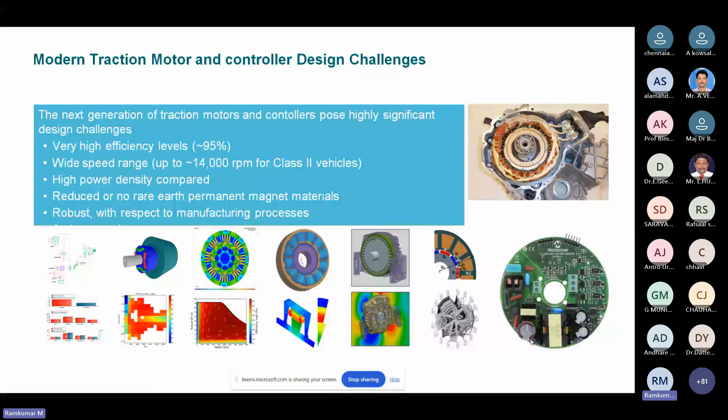Which means I need to produce a motor for the same. So due to that, axial flux is not developed in such a way to produce in vehicles in India. Some countries have established it, and India is also booming towards that. So these are the few points the industry is mainly focusing on in motor and controller design. Any questions?

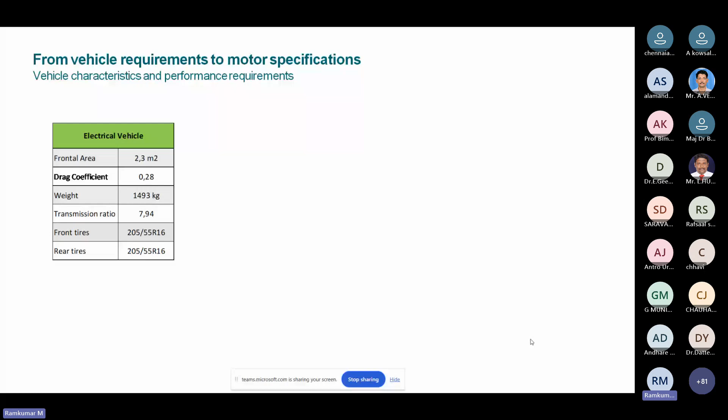Okay. When talking about electric vehicles, we need to know where I'm going to use this particular motor and controller. When I'm designing, for example, a battery, a gear system, a vehicle control unit, a DC-DC converter, or a charging unit, anything in an electric vehicle, the requirement should be there. What is the end user application, or the end user expectation? From the motor point of view, what is the top speed I have to deliver, which means the motor along with the gear system, how much speed has to go to the wheel.

When I'm designing for a maximum inclination, some degree of angle, if I'm climbing that, what is the minimum speed I have to maintain? In the product I'm using right now, we have a 25-degree inclination which I have to climb at 80 kmph. So there is a limitation for upper and lower, and you have to design a motor or any device within that.

Then we come to acceleration. When I'm giving throttle to the vehicle, how fast does it have to attain 0 to 40, 0 to 80, 0 to 100, or 0 to 120? What is the speed expectation from the user perspective? All this product study has to be done before starting the design of the product. Normally any OEM, which means manufacturer companies, start studying the market, what is the user expectation and where we are going to sell.

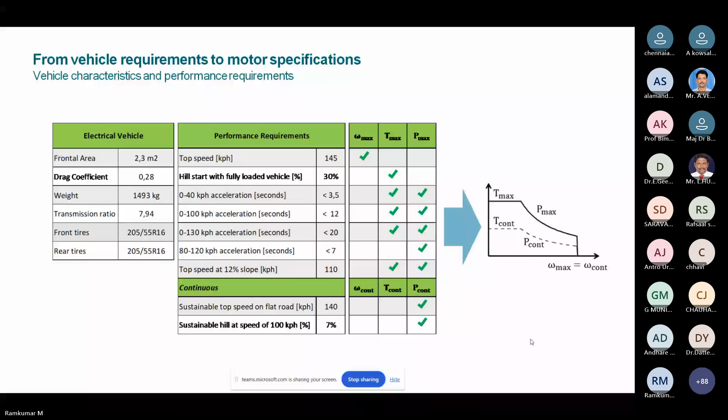So this is an interface showing how I am starting a simulation from the vehicle level. We will do a system simulation to understand the requirement of the vehicle. What is the max torque needed? What is the max power it needs? What is the max speed it has to go to? This kind of study we have to do for the electrical system.

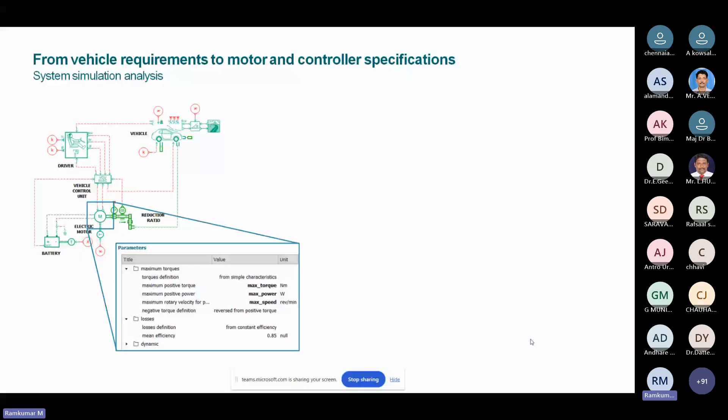We can have different sets: set 1, set 2, set 3. If I'm having this much power, what is the mileage? Say for example, I'm running a drive cycle, meaning the rider pattern. I'm taking a vehicle from Coimbatore and riding towards Chennai.

Maybe inside the city of Coimbatore, I will ride one pattern. From Coimbatore to Salem, on the highway, I will ride another pattern. Salem to Chennai, another pattern. If I'm riding like that, what is the pattern of the user, and how is the mileage getting drained? This has to be studied in the simulation.

From that, this is the expected mileage, this is the battery needed, this is the loss coming from the motor, which helps understand the torque-speed characteristics of the motor. This is the first parameter to the motor design engineer. I will tell them this is the maximum torque I need, and this is the minimum torque at each speed.

You can see speed on my x-axis. If I'm rotating at different velocities, what will be the peak torque condition? What will be the torque condition? This is called the NT curve. You might know this very well. This will be arrived at through the simulation.

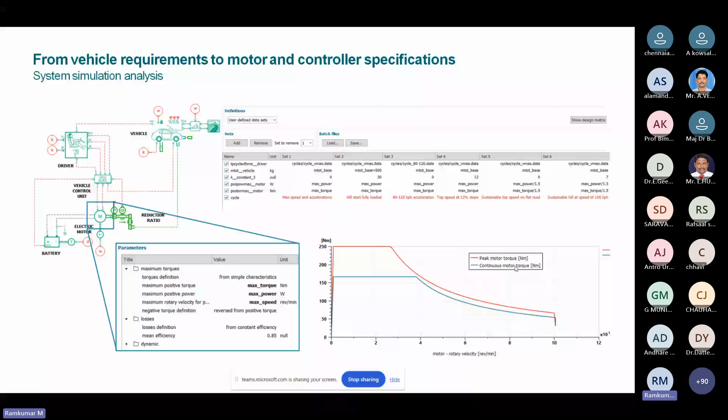All the industries are depending on the simulation aspect. Now a lot of simulation tools are there in the market. It may vary industry to industry, country to country, user to user, but ultimately the reason behind it remains the same. We have to arrive from the system at the requirement of the subsystem. This is what I'm trying to mention.

If I'm driving a particular pattern, what mileage will come? This is called WLTC. Outside India we follow this drive cycle. Inside India, we follow a drive cycle called IDC, the Indian drive cycle. Outside India it will be WMTC, the world motorcycle test cycle. There are different drive cycles for different countries and continents.

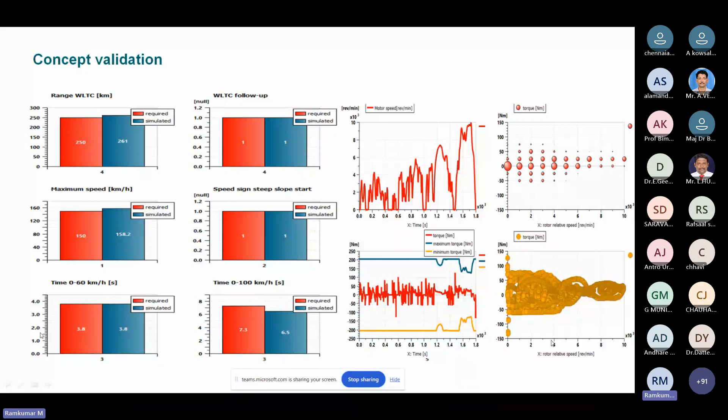So we will be predicting: if I'm driving this pattern, this is the torque needed, this is the speed needed, this is the acceleration needed. From that, we go to the subsystem. Our subsystem will be the motor and controller. So far, we saw the overall architecture of the electric vehicle. What are the electrical parameters for the motor? These are the three major inputs, and from that we will start.

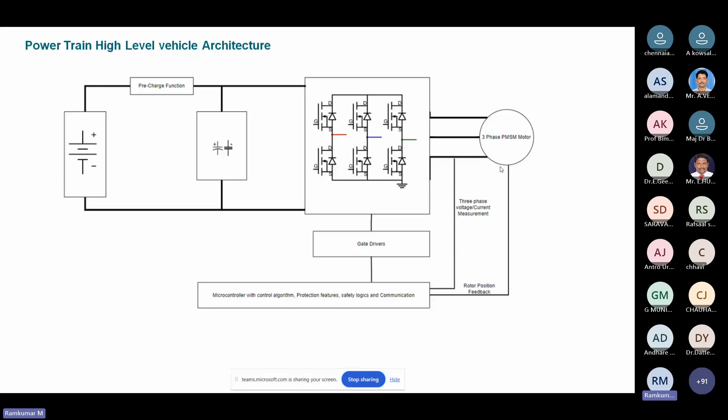As a designer of the motor and controller, we will start with the controller and the motor. The steps shown here are for the controller design, which means we need to know the system requirement. What is the system requirement? Say for example, what is the voltage I'm going to operate at?

What is the available maximum current? Say for example, what is the motor back EMF? This is important because we faced major issues. I would like to spend a couple of minutes here on how the motor characteristics are integrated with your controller characteristics.

Okay. So when I'm selecting a MOSFET, maybe I declare a 150 volt MOSFET, which means the voltage if I'm pushing either forward or backward is 150 volt, the drain to source voltage. If I'm passing more than 150, it will open out the terminal. So that is called the maximum voltage that can be pumped.

Okay. So when I'm designing a motor, the X team is doing the controller, the Y team is doing the motor. What the motor designer did, he designed a back EMF with respect to 175 volt. Then the hardware designer selected the BOM with respect to 150. When I'm running at high speed, if my vehicle is getting cut off or purposefully I'm doing a high speed, the MOSFET will blow open.

Okay. So due to that, we need to know the system requirement, which means what back EMF will come at different speeds. Say for example at 1000 rpm of the motor, what will be the back EMF? Sorry, you are talking about only a high speed back EMF. If I'm able to control that, what is the effect of having a low back EMF at 1000 rpm, when say my vehicle is 10,000 rpm? At 10,000 rpm my back EMF is less than 150, your requirement is over. Why are you worrying about 1000, 2000, 3000 and all?

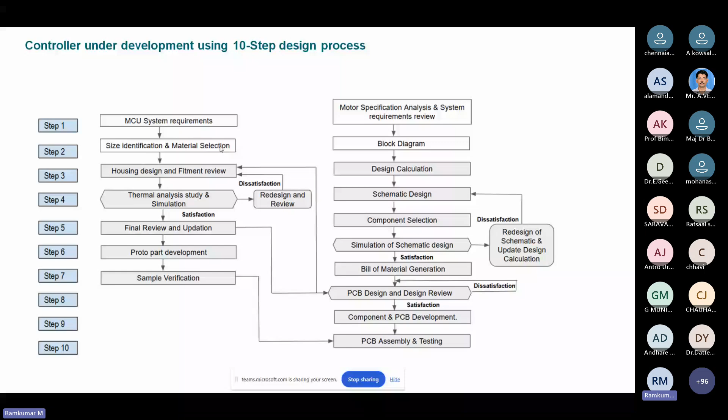How to make a design for that, how to make a schematic for that, how to make a Gerber for that. So we have to have a look into that one by one. We have to verify it. We have to make a prototype. We have to test it. We have to go for it. This is a step we have to follow in the controller design. Then in the motor design, again the same validation will come: the system requirement, the simulation aspect analysis, then prototype, then calibration of the loop.

So any system, not only a motor, not only a controller, any system, we have to start from the system requirement. Then there is a simulation. From the simulation, we have to go for a prototype, then prototype to testing, testing to calibration and fine tuning of our entire understanding. Then we have to go again to the design, modifying the design, prototype, test it, and finalize the design. This is the flow we have to follow in the industries.

Okay. In a controller, we have to have a design like that. Encoder selection. I hope everyone knows what an encoder does. Encoder will be the position sensor for the motor, which will be near the motor controller as well as the motor shaft, which means your motor will be communicating where I am right now, because PMSM is not a self-start motor. To start the PMSM motor we have to do two things: we have to do a VD0 and give a three-phase supply, which means I have to align it to D axis 0. Then if I'm pushing a current, it will start rotating.

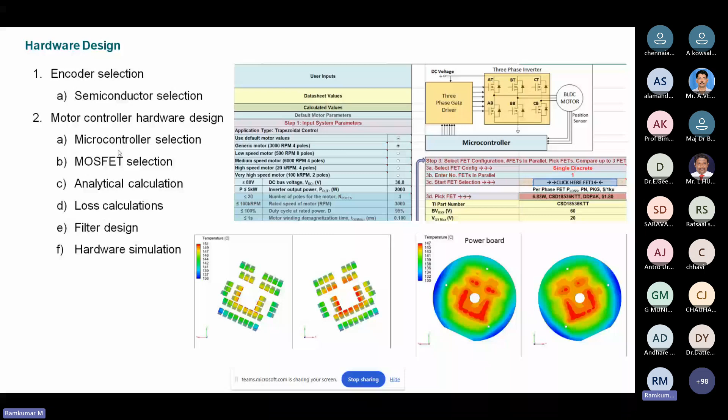Second thing will be ripple. So I have to have a kind of filter before the drive unit - meaning for my drivers, I need to add some LC filter or not. Those kinds of calls I have to take based on which IC I am going to use. This is how we are selecting the component. Then we go for the design - starting with analytical calculation, then loss calculation, then filters calculation, then hardware simulation. These are the kind of flow as we saw in the previous slide.

Like this, we have to go for the design.

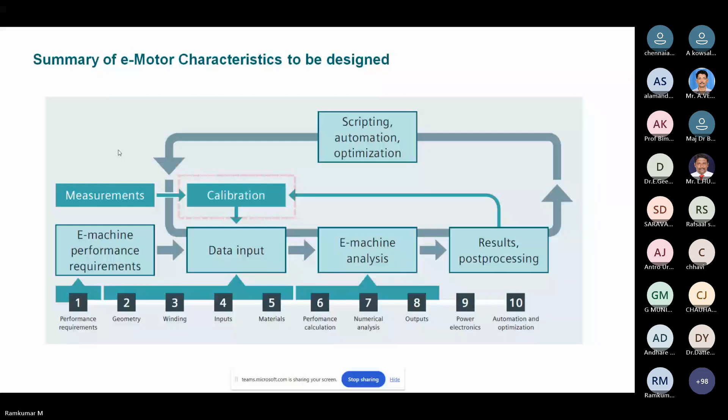In my current architecture, or any electrical vehicle architecture, as a motor controller we may have a DC input. In the DC input we might have a DC link capacitor to have smooth interaction between the controller and battery. It will also prevent sudden flow on surges - it will impact the ripple as well as smoothing to the back EMF. These are the two things it will help into the system.

Second thing, we may have a DC voltage sensor to sense what voltage is coming in, so based on the voltage I can have an algorithm. Say I'm operating at high voltage - say my voltage is 72 in the system, which is high for me. I can inject an Id-Iq which is deciding the torque can be very less, meaning voltage is high so I can push less current to produce the same power. If my voltage is getting dropped, meaning my power will be reduced, I have to inject a little more current to maintain the same power.

Ultimately, I have to produce the same power. If voltage is high, I can have a subproduct where current will be a little less. When my voltage is getting dropped, I have to inject a little more current to produce the same output power. This strategy has to be handled by the software, so that is what we have to write an algorithm for.

Normally I segregate IDIQ, which means direct axis current, and Iq, which means quadrature axis current, into high voltage, mid voltage, and low voltage. I will have a three lookup table into my algorithm.

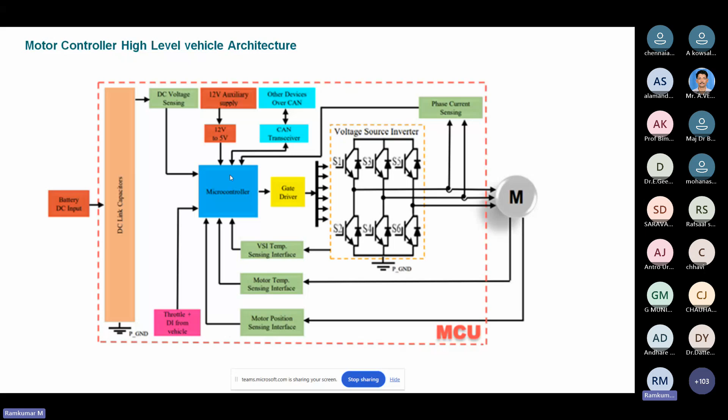It will get an analog value, and from the analog value it will convert to a digital value for you. It will give the signal straight away, and from the signal you have to read and react to it. These are the strategies in the two-wheeler or car segment, depending on the architecture. These are the points I'm trying to mention, highlighted on the left side.

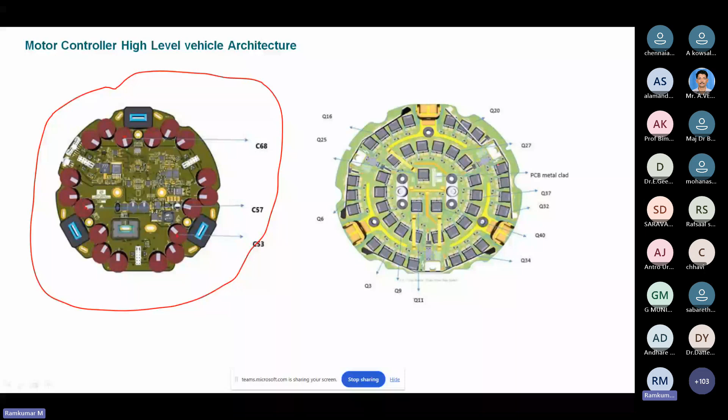This left side product will be my LV section. The other one will be my HV section, which means my power board. The power board will have my MOSFET and gate drivers, so other ICs will be seated there to handle the power things. It has to be connected together as a separate board, connected one to one for communication purpose and for supply purpose. The LV section will have interaction from the controller board to the power board, and the HV section also needs power transmitted from the LV section to the HV section.

Okay, so any questions from the audience or members?

So we talked about the controller design. Then we will go for the motor design and system level next. So when we are doing this motor design...

Yes sir, we have a few questions. Yes sir, please. Which is the most commonly used microcontroller for motor driver application in the industry?

In the industry, we are using S32K3, which has the capability to handle ASIL C micro safety, available from NXP as well as microchip, with our switching frequency supposed to be 15 kilohertz minimum. That is the expectation, then the microcontroller IC should handle ASIL B minimum. This is what the standard says, so based on the standard we have to select the IC. In Royal Enfield, we are using ASIL C grade, which is one step ahead of the standard, with 15 kilohertz, using the S32K3 NXP IC.

Sir, one more question. How does the controller implement various motor control algorithms, for example PID or FOC, at a high level?

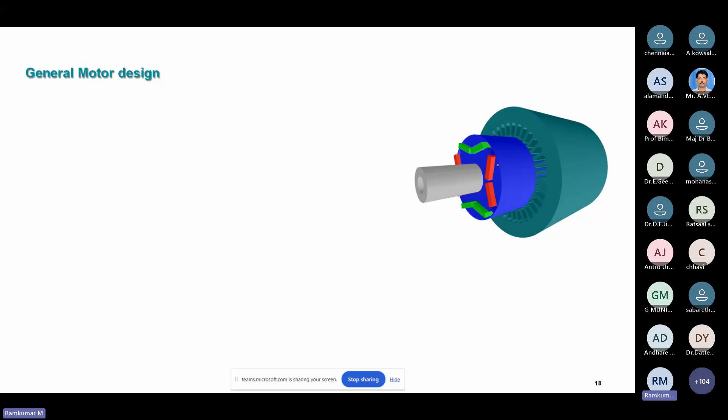So next will be motor design. This may be my second but major domain. I would like to share my history, how I came to be a motor design engineer. So the first job for me was writing algorithms for the controller in embedded C.

I still remember, so I went to the job. Within 2 months, there was a chance to test the algorithm I wrote. There was a motor given, a test bench given to me. The first motor shaft was broken in my first test itself, which means my algorithm frequency was not synced with the motor. My algorithm frequency was something different, my motor switching was happening into some other things, it hit my test bench, and it got broken. This was the first thing.

Then I understood I'm not only a software engineer, I should be something else. So then I started to dig into that. There was a chance to move from software engineer to designing a PCB, since it was a small startup company. So within 6 months I became a hardware plus software engineer. Then within another year, I also became a motor design engineer. This is how my journey led to becoming a motor controller design engineer, so this is the flow. When I became a motor controller engineer, I came to know the entire system.

I'm really requesting all the audience sitting here, please teach your students about system requirements. If, for example, you are designing an induction machine, there are different classes of duty. Whether it's continuous duty or intermittent duty, whatever class of duty you define, the design has to be changed accordingly.

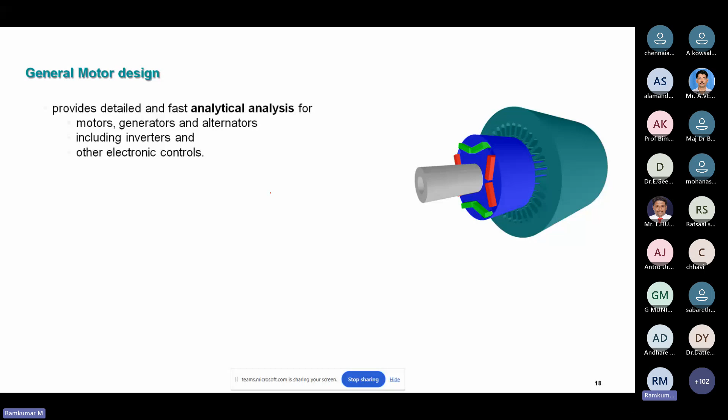So when I'm starting a design, I should know the motor characteristics. I should know the generator along with inverters and control logic. This is what I'm telling. So that's why I'm talking about analytical calculation, which may be Excel, which may be MATLAB, which may be 1D simulations. There is a professor called TJ Miller. I hope everyone knows. He wrote books also. He made excellent software called SPEED. So this software will create the entire motor design within 2 seconds.

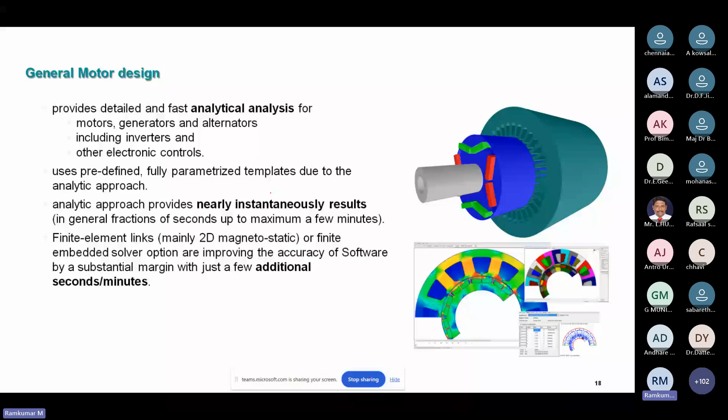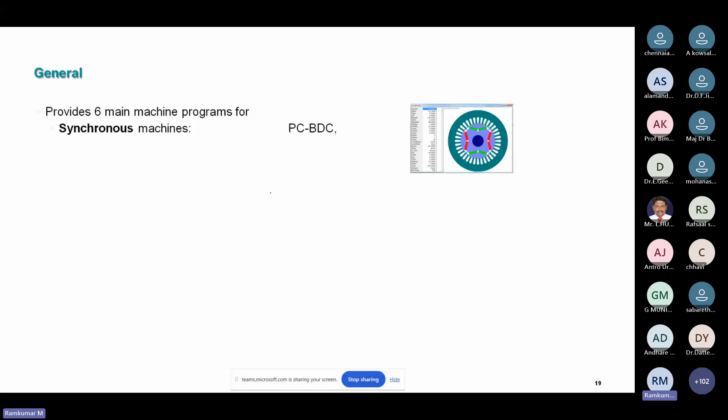If you are giving the limitations, say for example, this is my L by D ratio, this is my power requirement, what is the possible slot pole combination? What are the possible motor characteristics? The same characteristics we can compare with different motors. So when I say I want a particular torque and speed, which motor do you want to design? It may be a BLDC, an induction machine, a reluctance machine, or a DC machine. So many machines are there in the market. How to decide which motor I have to design? This platform will help you.

If I'm designing this particular motor, what bill of material will come? Bill of material means how much weight your rotor core will have, how much weight my housing will have, how much magnet weight, how much length, how much width. The entire characteristics of the motor you will come to know.

So how can I go for it? When I was doing the initial design, I came to the conclusion for my design: BLDC, which is called a PMSM, with concentric winding. PMSM originally will have a distributed winding, but in the EV industry we are using a concentric winding. This combines BLDC and PMSM characteristics. And axial flux has major advantages. So when proceeding to the next stage, I propose to my higher management: either I will go with the PMSM or with the axial flux. These are the merits and demerits of both designs.

When I'm proposing that, I'm not the only person going to decide the design. My manufacturing guy, my quality guy, my testing guy, my system guy will come and sit, and also battery and other subsystem guys will come into the picture. They will ask their requirements. From the battery, if I'm asking for 500 amps current, he will not give it to you. His limitation is 100, 200, 300 amps. He will tell whether he is able to produce within the parameter. Then my mechanical designer will come: my vehicle environment is this, for your motor you can have this much size. Within these limitations, which machine are we going to adapt?

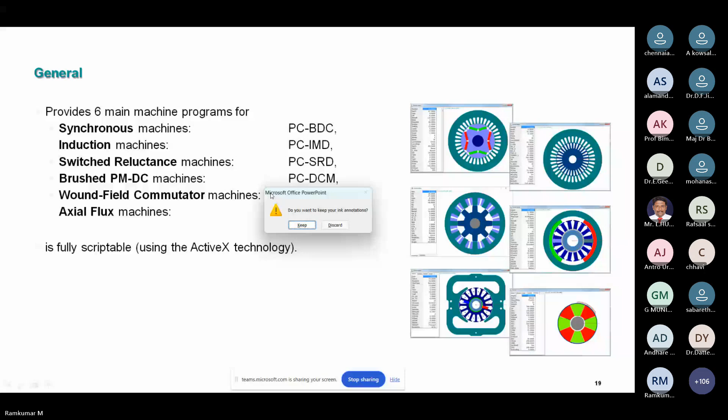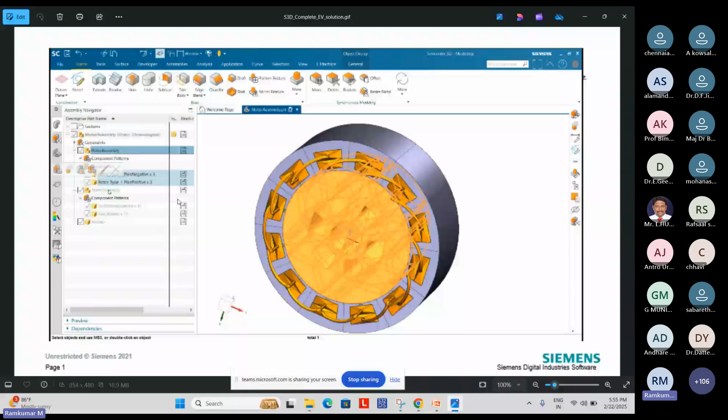See this particular video. When I'm changing this panel, okay, what are the inputs? I'm designing a machine with respect to slot pole combination. I'm going to the particular model. I'm changing a particular value. You see, the entire model gets updated from the stator to my given value. Okay, this is not an inbuilt software characteristic, which we have to make fast for the user.

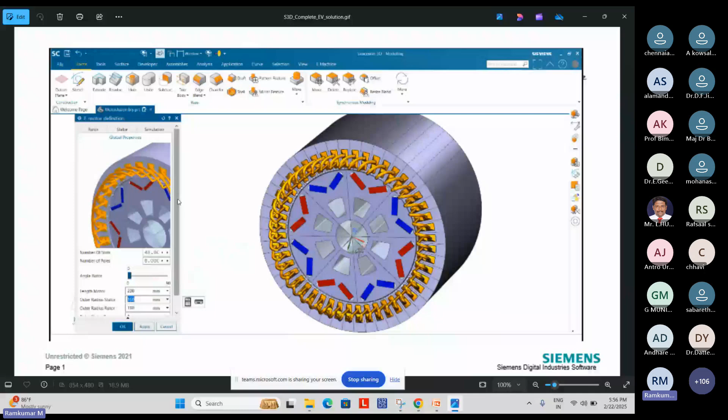For example, I'm designing a 3D model of a particular motor. If I want to design it, it will take 2 to 3 days for a particular slot pole combination. Again, I want to try a different slot pole combination. If I try it, again I have to take 2 to 3 days, which the industry will not allow you to take. For that, we wrote a script along with my team.

So when I'm having a particular requirement from the current design, if I'm changing a particular length or a particular slot pole combination, can I run the simulation? Yes, we can, which will make it very fast for you to proceed further. And also you can have a DOE, design of experiment.

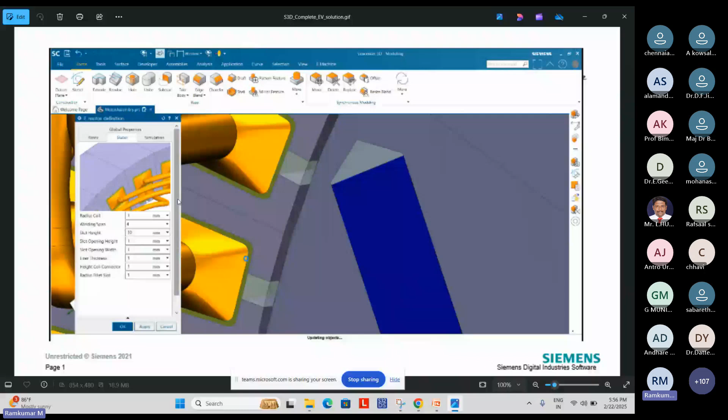If I'm doing this, this is my output. If I'm having this combination, this is the expectation. If I'm having a stack length of X, Y, Z, what will be the result? This kind of iteration can be done not only in analytical simulation, but also in a 3D simulation. Okay, so this is a normal industry practice.

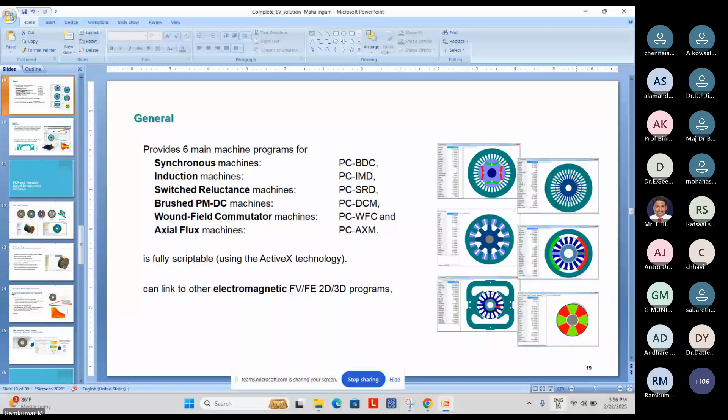So once done with the particular design iteration, you have to look into that. We run a simulation. You see, n number of iterations tried. In the n number of iterations, there is one place that came near to my requirement. These designs are going to help me at the further level, which will happen within half an hour. That is more important. I tried every simulation in the platform of the SPEED software to conclude in half an hour. So I try, say for example, 1,000 designs.

Out of 1,000 designs, I'm going to pick only 10 designs. In the 10 designs, I can further investigate. I can shortlist a number of designs. Okay, so this will make things very fast for you. You can see here I'm getting an efficiency map. I'm getting speed torque characteristics. All those things. From that, I can conclude my design.

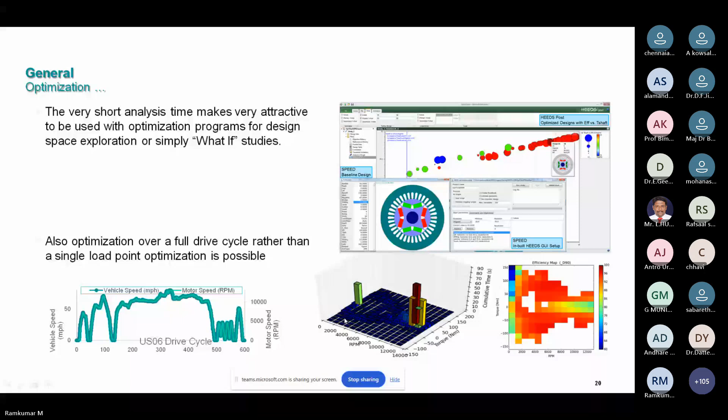Okay, once done with the 1D simulation, we will move to the 2D simulation. Again, if you are not convinced with your particular model, we can do any of the models designed in the previous 1D platform. Here we can study temperature, flux density, or demagnetization effect. I hope everyone knows demagnetization. Okay, so magnet, if you are...

Say for example, I'm using an SH magnet, which will withstand 150 degrees. If I'm using a UH magnet, it will withstand 180 degrees. If I'm using a UH plus some additional material, it may go to 200. If I'm using an EH magnet, it will be 240 degrees. These are the different magnets.

When I'm using this magnet, if my motor is getting heated up beyond the particular temperature, the magnet will get demagnetized. Or in the motor, if there is eddy current loss in the magnet, it may also lead to demagnetization. So these are the things you have to study and understand as a field study.

So field, we are talking about B, magnetic flux density, magnetic intensity. Your heat flow, thermal heat flux, magnetic flux, all those things we can study. We can understand how this motor is going to get... or the study will happen on the particular platform.

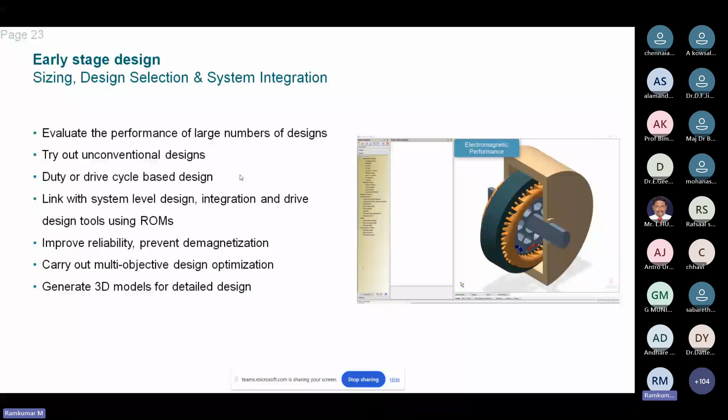Once done with that, we will be moving to the multiphysics simulation, which is called 3D. Before moving to that, we may also have in the 2D platform a drive cycle, meaning different speed-torque characteristics. If I'm changing it continuously, for the first 1 second I'm running with a particular speed and particular torque. In the second curve, I may have a different profile. If I'm running like this, how much time will it take to heat up to the maximum temperature?

For example, I have a cutoff at 190 degrees in the motor. At 190 degrees, to run this profile, how many cycles does it have to go? Say I'm starting a vehicle from Chennai to Vellore. If I'm going at max speed continuously, what temperature will it reach? Will it reach the cutoff or not? Those kinds of questions will be answered by the simulation, so we can go for the detailed study as well.

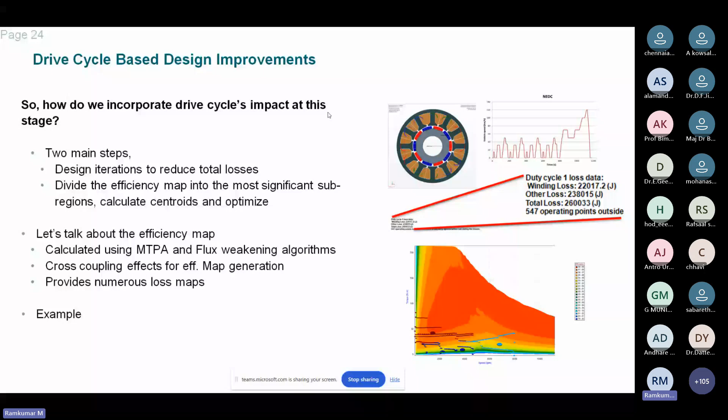Once done with this particular study, we can go for 3D model integration or system integration, where we study the vehicle-level things. We can pull the whole motor design into that, run it once again, and understand whether all the characteristics are fulfilled or not before moving to the prototype.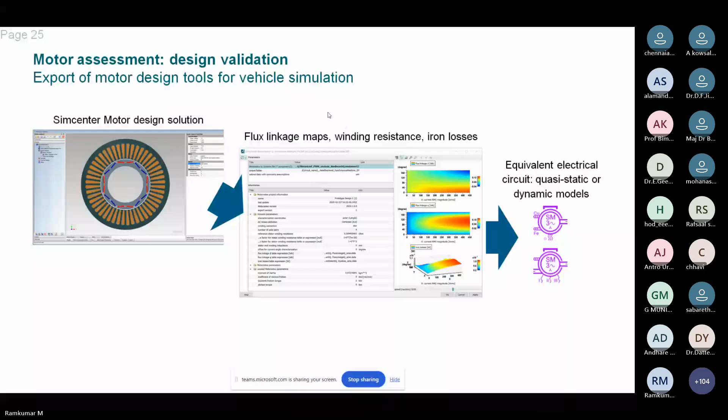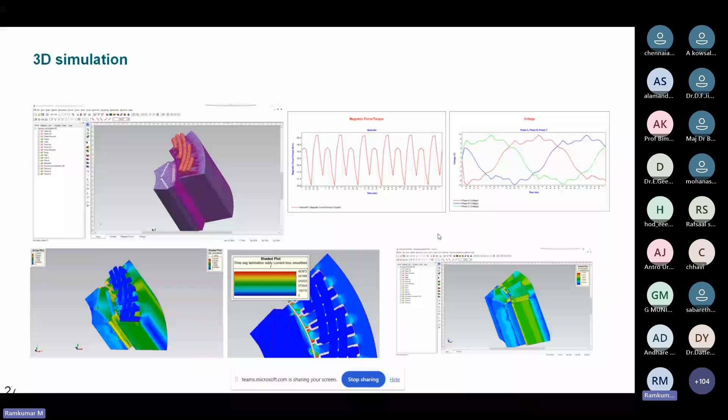3D simulation is really tough, but it will help you understand the major impact: each corner of the motor, the entire 3D model, we have to study and get the feel of the particular design. So you have to understand the different aspects. This is the video I showed you as a 3D model. Any questions on the simulation? 1D, 2D, 3D?

Sir, no, sir. We can move forward.

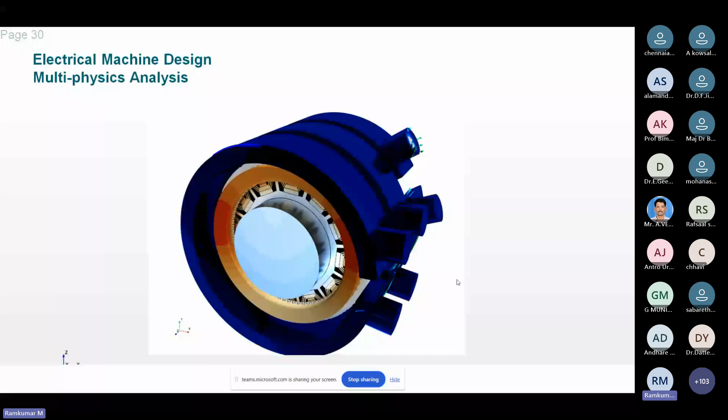Next will be multiphysics. I will show it in this video, which is separate. I'm using an older version of the PPT, so it's not available in this PPT; that's why I have a separate file for it. When we are talking about thermal study, we need to understand how much. For example, if I'm running an air-cooled motor, after some X kilometers, maybe 100 or 200 kilometers, my vehicle will get a cutoff. Will the user like this or not?

This question will come. The user may say, I'm from Bangalore, starting from Chennai, 350 kilometers from here, and I don't want to stop in between; I want a single ride. Is your vehicle able to provide that? If that requirement comes, we may go for cooling technology, meaning another oil system. The oil will be pumped into the motor, either the housing or the shaft; different duct systems are there. We can have forced cooling, extract the heat out of the motor, and run a little more distance.

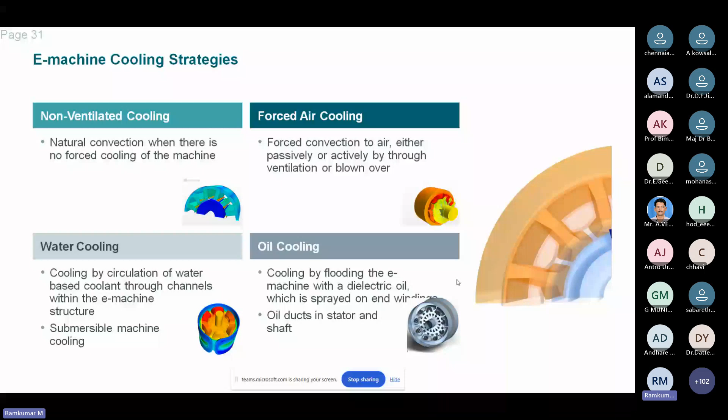So these are the studies we have to make: either conventional cooling or forced cooling. If it is conventional, it's air. If it is forced, we may have forced air, or an oil or water jacket. So different cooling technologies are there to incorporate and study after the simulation. The flow will be 2D simulation, extracting the loss. From the extracted loss, we do the thermal analysis. If the thermal analysis shows the temperature heating up too much, we have to go for a design change.

Can I change the thickness of the motor fin from 10 mm to 15 mm, or 1 mm to 2 mm? If I make that kind of change, what will be the impact? If my temperature profile is good, there is no impact on my first design. If I reduce the fin size, it will reduce my BOM cost, because I'm using an aluminum housing or a particular compact, costly material. So if I reduce the size of the housing fins, can I go for it?

Next, if it is oil cooled or water cooled, I'm pumping at 10 liters per second or whatever it is. If I'm pushing 10 liters and the temperature is good, can I reduce the flow from 10 to 8 or 8 to 6? What will the impact be? If the flow is not sufficient, we have to increase it and see. These are the simulation iterations that have to be done before making the prototype. So this is the characteristics of the motor, and these are the variations of my design.

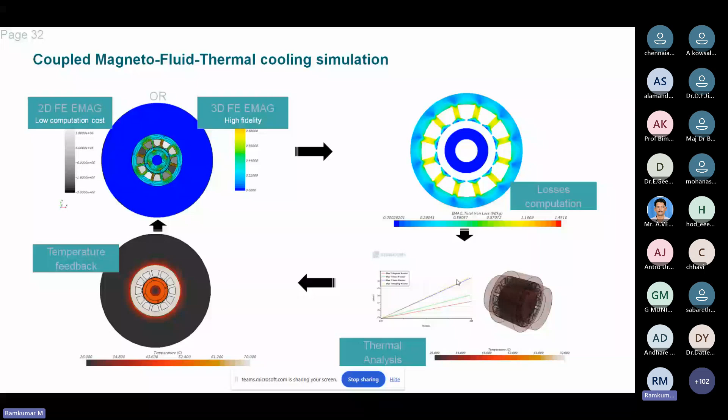So from this variation, we can understand the entire capability of the particular design. So this all will be virtual, no cost for that, which means all the industries having the simulation software are producing the particular simulation results. From that, they are going for the particular manufacturing.

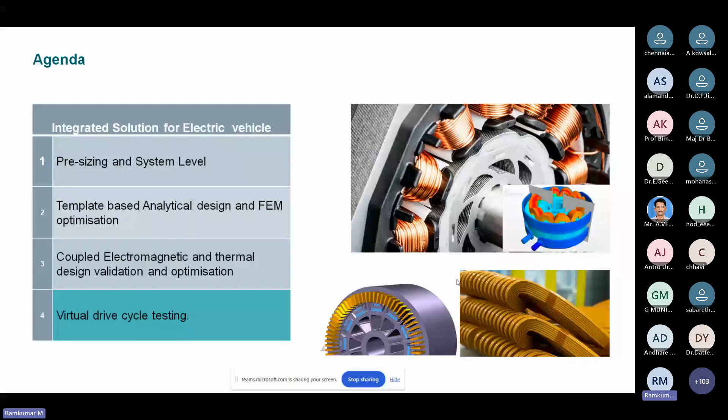Okay. Now we are into the system validation. We made a particular motor, we made a particular controller, we made a particular hardware, we made a particular cooling technology. We understood the entire motor controller. "Sir, I made it so good, sir. My design is giving you 99% efficiency," or even you imagine 100%. It is not possible, 100% efficiency. So is my job done or not? No, your job is not done. You have to prove, when you are putting your design into the system, it's going to work or not.

Because, say for example, I made a motor. When I'm going to connect it with my gear system, it is not going in, which means my sprockets are not in line with the design, or my mountings are not okay, or in my algorithm where I communicated over the CAN protocol, the CAN is not getting proper information from my vehicle control unit or my battery system. What will you do? Nothing to do. It will not even run in the system.

So when you are talking about only the efficiency of the motor, you may get 95% if you are doing a good integrated motor control. The maximum 94, 95 we can achieve, at any power rating I'm talking. Okay, so you may have a better design, but when I'm putting it into the vehicle, your efficiency may vary because our drive pattern will be varying. So you should understand at a system level how the losses are going to happen.

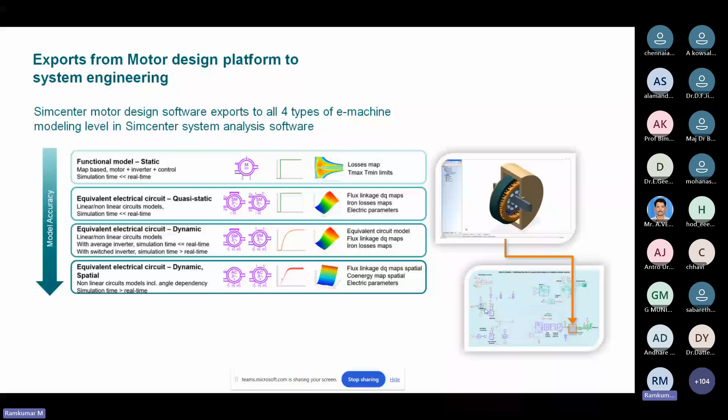So we can produce the drive cycle. You can see when I'm driving at different times with respect to different kmph, what losses are coming, how the torque is produced, how much efficiency is there. So this can be predicted before manufacturing the particular motor itself, which means my complete validation is virtual.

If you are a good designer with a good understanding between you and the tool, the variation between the simulation and prototype is not more than 5%. Almost 10 years I'm in the market, and I never saw a variation from the simulation, if I did a 3D model. I'm talking about a 3D model. A 1D model will have 80% accuracy to the prototype. A 2D model will have 90% accuracy to the prototype.

Your 3D model will have 95% accuracy to the prototype, which means if I'm going to declare to my management, sir, my motor will produce 100 newton meter at 10,000 RPM, it will at least produce 95 newton meter, 9,500 RPM. Okay, if that confidence comes from your simulation tool, they are happy because you have not wasted any materials, you have not spent much time to market. You run a very fast simulation, you come to the conclusion, you proceed.

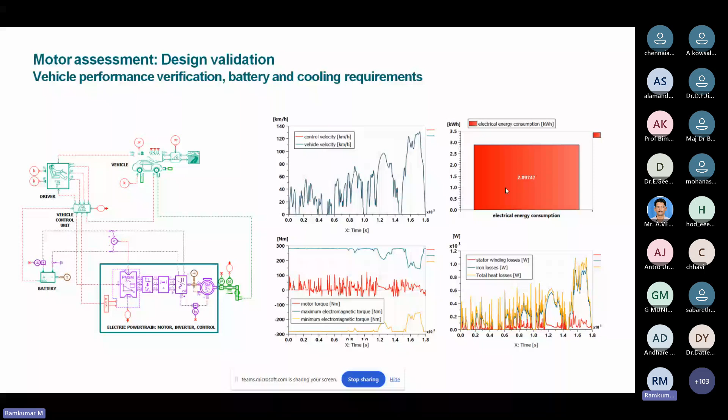So this is the flow we have to follow for any design. Analytical, then analytical to 2D, 2D to thermal, thermal to 3D, 3D to system validation. Whether it's a motor or controller, both are the same. So this is the flow we have to follow.

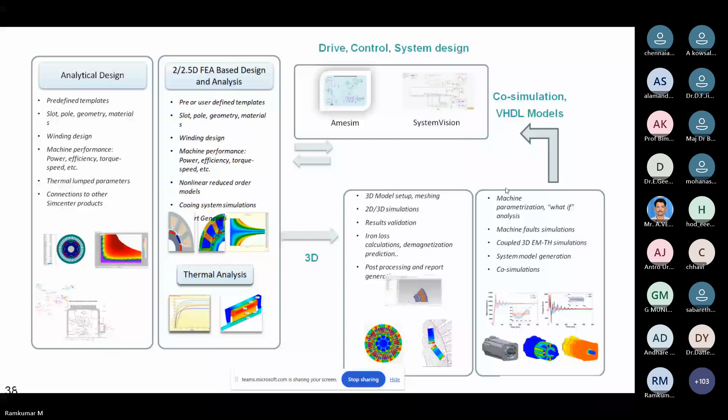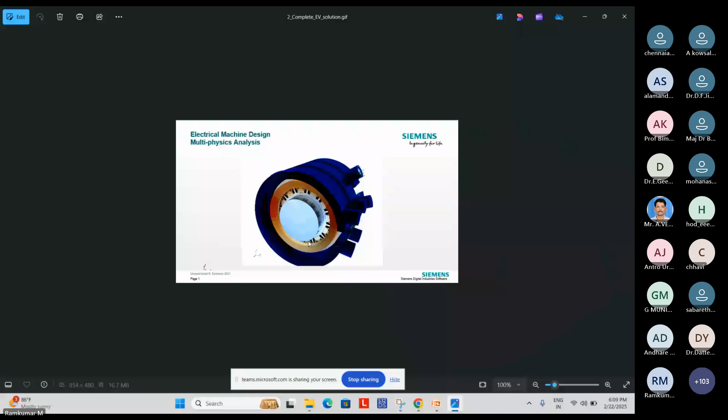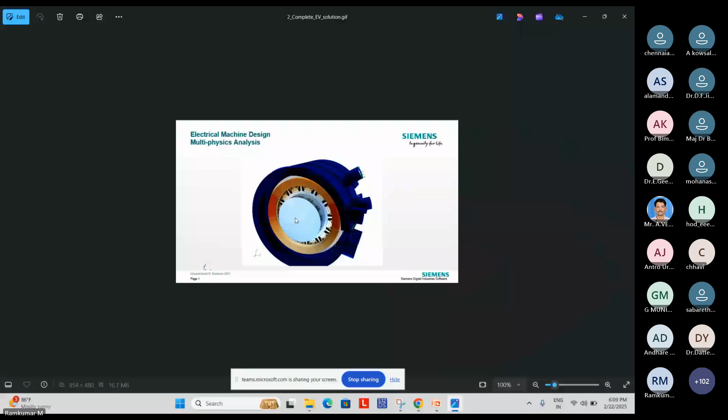I would like to show one video. I missed it here. See how the visualization happens. How much temperature will be there, how the flow will be there in different locations of the motor. You can see the blue portions, red portion, green portion. This will indicate to you how much temperature is in the particular design. Okay.